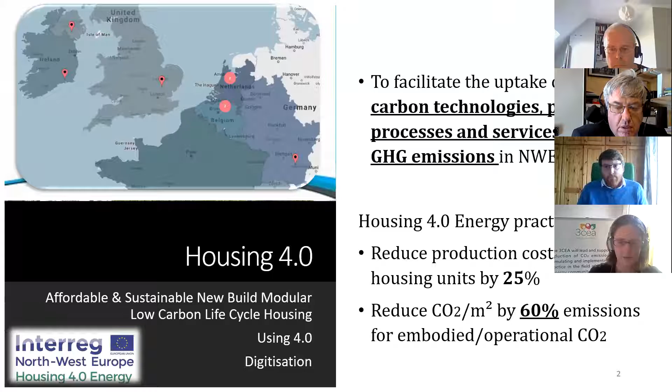The aim of the project is to facilitate the uptake of low carbon technologies, products, and processes to reduce greenhouse gases. That's the overall goal of the call for the project. This particular project, Housing 4.0 Energy, aims to reduce production costs of new build housing units by 25%, and at the same time reduce the CO2 emissions by 60%. That's CO2 emissions of the embodied materials and the operational use of the house.

How are we going to achieve this? Low carbon design is obviously critical, and my colleague Ralph is going to talk a little bit more about that after me in a few minutes. So particularly looking at low embodied carbon materials, in terms of NZEB and the new Part L technical building regulations, our energy ratings and energy building of homes and buildings now is already quite low. So what are the other options of reducing carbon emissions? Looking at better or lower embodied carbon materials, also looking at logistics and procurement, local contractors, local supply, less transportation to site of materials and M&E systems etc. Obviously the less transportation, the less carbon emissions relating to that build.

And finally, what I'm going to go into a bit more detail about now is the digital platform. How do we replicate the designs of these homes to make them more replicable? And therefore, if it's more replicable and easy to use by clients, designers, homeowners, housing associations etc., will that reduce the cost?

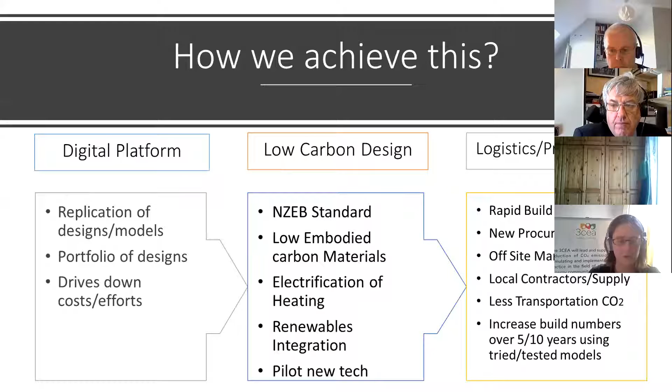Housing 4.0, based on the original idea when this project conception started back in 2015, 2016, we were looking at Industry 4.0 - the trend of automation and data exchange in manufacturing. So digitalization, using smart technologies, using data exchange. How can we bring all of that together in terms of housing?

So design for manufacture - I'm not going to talk too much about this because I'm sure you're all well aware at this stage. Design for manufacture, design for local manufacture, which again looks at the reduction in the need for transportation, and again the reduction in CO2 due to transportation, so keeping everything local. And then design for assembly - so design for manufacture and assembly. That's the model that this project is based on.

So what can we do here in Ireland? We're working with a number of partners across the EU, some of whom are at a much more advanced stage.

The idea behind the Interreg funded projects is that we learn from our European partners. We're not trying to reinvent the wheel here. There are plenty of people and plenty of countries doing this already. So how can we learn from them, and how can we increase the uptake of such design for manufacture and assembly here in Ireland?

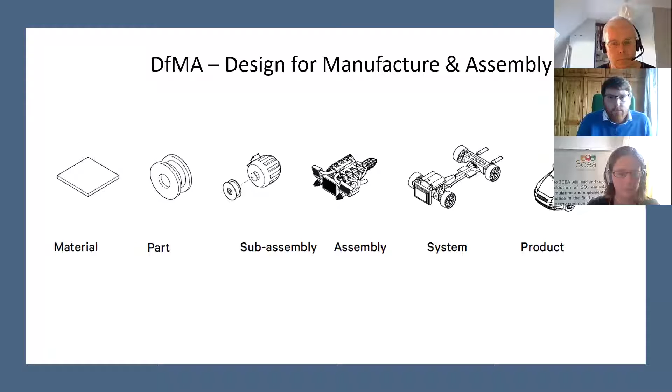Just a couple of simple examples to give you an idea of what we mean by design for manufacture and assembly. Here's a car - the end product is the car, and we look from the very start: what materials are we using, each of the different parts that come from the various suppliers along the supply chain, assembly in the factory, and then the end product is the car. So that's a very simple one.

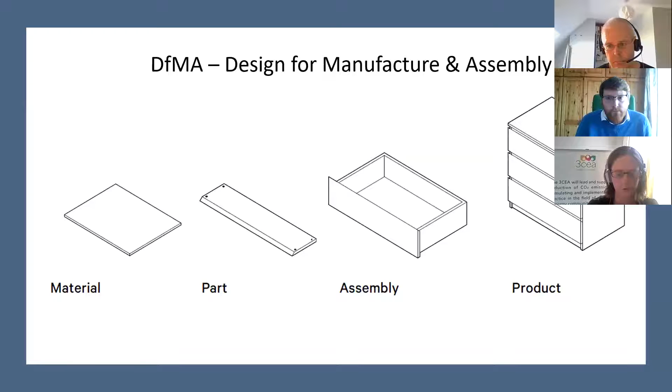At the same time, another very simple example - I'd be very surprised if there's anybody on this webinar today who hasn't put together some kind of IKEA or other piece of furniture. It's exactly the same idea here. We start with our material, each of the parts are made individually, and then you purchase the product and assemble it yourself at home and end up with the end product. And if you have a screw left over at the end, you know you've done something wrong - that's if it's IKEA anyway, it's all very exact.

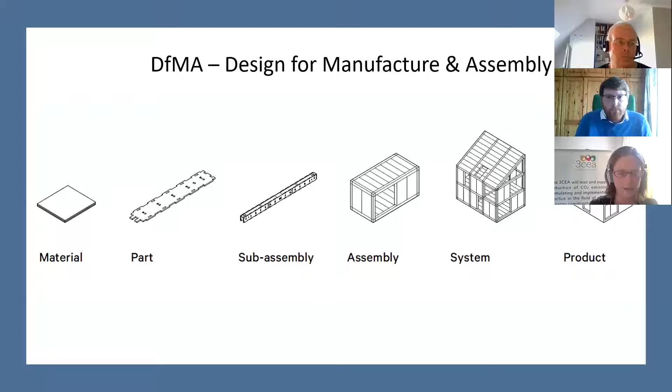In exactly the same way, we're trying to bring that idea to a larger scale, with our end product being a housing unit in this particular project, Housing 4.0. So modular build of homes, easy design, low carbon materials, supply off-site, assemble on-site.

How we're looking to do this within this project is by creating and developing a digital platform. We're working with our 3 partners here in Ireland, and there are 4 or 5 other partners across Europe doing similar work. The pilot sub-partners in Ireland - Carlow, Kilkenny and Wexford local authorities - are all designing and building their homes. We are taking that information from the units they are designing and building, and creating a digital platform. All of that information will be open source and available for use by the local authorities themselves, by other local authorities, by other housing associations, or indeed by individual private homeowners who want to build a modular low carbon build home.

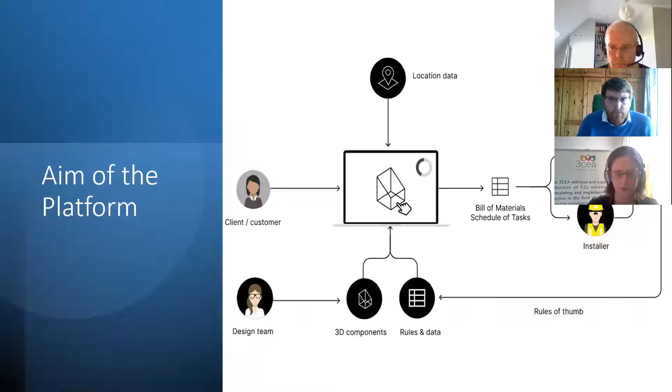So the idea of the platform is that we get all of the individual components, the 3D components, and all of the rules and data, and it's put onto the platform. The client or customer comes along, designs their house, and the platform will create the bill of quantities - basically the bill of materials - send it off to our local manufacturers and installers, and the unit can then be manufactured and built on site.

The digital platform - here's the back end view. The top is what our end user should see, and I have another picture at the end. It's still in development, so this isn't the final version, but this gives you an idea of what we're developing. The user interface is at the top - that's what the user sees: I want to build a house, this is the type of units I use. The back end is all of these, what we call the hanger configurator - the different envelope types, and how it's all pulled together.

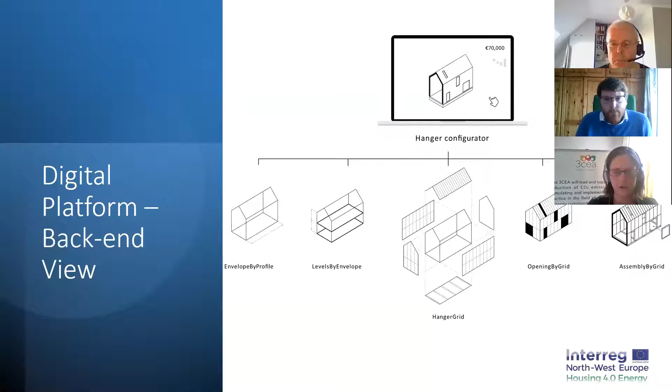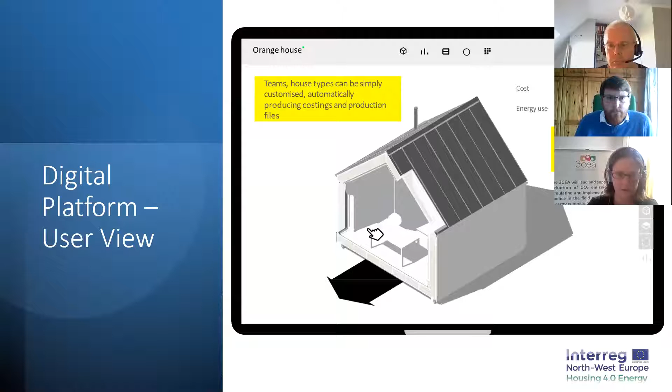From a user point of view, this allows the end user - the private homeowner or housing association, whoever is using the platform to design their home or houses - to come up with a detailed bill of quantities, which gives a detailed cost. Also, very important to this project, an energy consumption and usage performance of the building, based on all of the details of the different material types, the building envelope, the mechanical M&E systems, etc., that the user has chosen.

I've mentioned already our sub-partners, Wexford County Council, Carlow County Council and Kilkenny County Council. We have Sean from Wexford County Council, and he's going to go into more detail about their specific pilot, which is a block of apartments, a 4-unit block.

In terms of innovation and replication, the digital platform, it's essential that we get as much information on the platform to make it usable, help with scale and ease of use, and lead to cost reduction. One of the aims of this project was a decrease in construction cost of units by 25%, which we've looked at doing through these pilots. There will be other design and building systems used by other partners across Europe, all available on the platform for everybody to use.

There's a necessity for using non-fossil products, so the low carbon element of this project is absolutely critical. I mentioned before the new building regs, Part L. We're already building much more energy efficient homes than we used to, but what are the other ways? Looking at different materials is critical, and piloting some new technologies. Ralph's going to go into that in more detail in a minute.

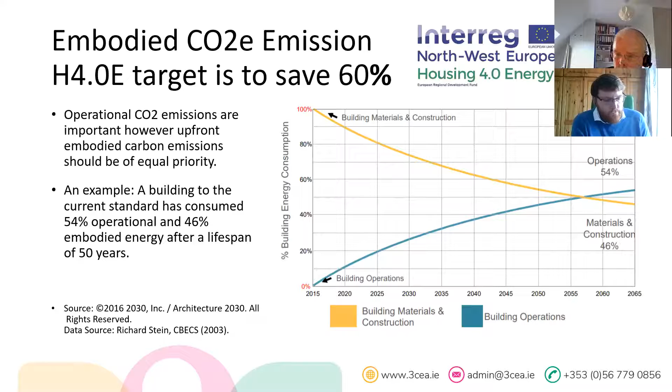That means the major impact will still be the upfront embodied CO2 emission used to build the house, and that is what we need to reduce as well. We should also know that the weight of the upfront embodied CO2 emission will be even increased when we move from NZEB buildings towards zero energy buildings.

Full life cycle assessments, cradle to grave, are very important contributions towards a sustainable future. However, it's crucial for climate change mitigation to reduce CO2 emissions now and within the next decades. We are planning to achieve our savings through substitutions, which are low embodied carbon building methods, low carbon and renewable building products, and recycled aggregates.

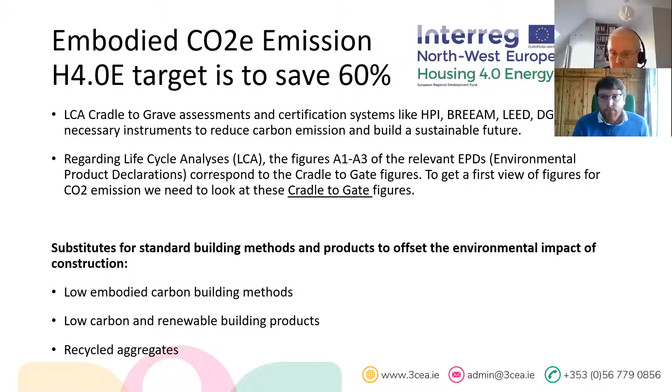The financial sector also has a big influence and can support this. Climate change is meanwhile accepted as a financial risk, so green investments will be preferred, and cheaper capital is also accessible.

Regarding the new EU taxonomy, building developments count as green investment if the benchmark is at least 20% lower than the minimum requirements, and we are sure that an upscaled H40E project via the platform will be a green investment.

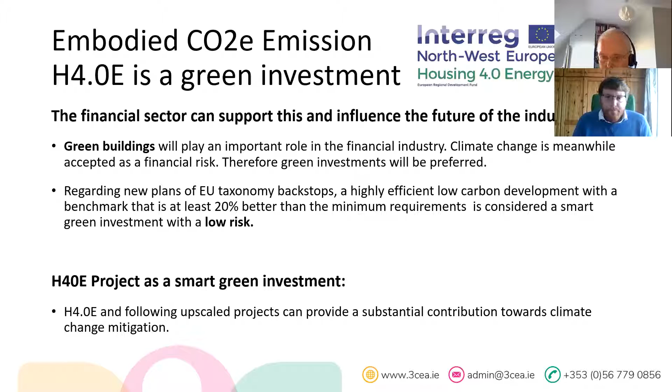So why do we need this comparison scale? We need to find out which substitution or combination will achieve how much savings we need to achieve.

We develop a detailed program for a baseline construction type and for improved types. The detailed development includes an analysis of the U values, humidity, drying reserve, temperature, summer heat protection, and an LCA assessment based on EPD information from the used material.

So the LCA will be an A1 to A3 cradle-to-gate analysis, and the basis for these calculations are the quantitative surveys of the Irish pilot designs.

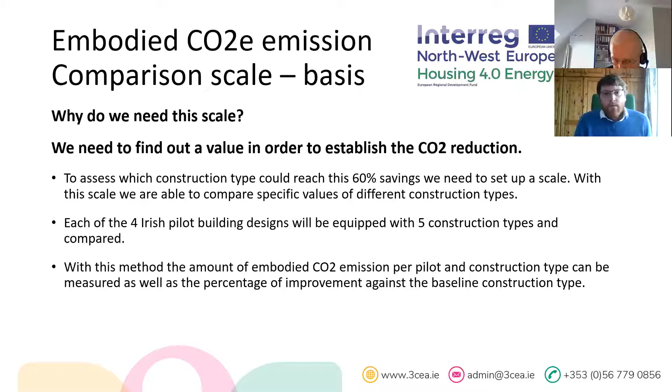In order to make the comparison, we used a calculator called Ubakus, and we designed the various details of the construction types with the aid of this tool. This tool calculates the LCA based on the construction details.

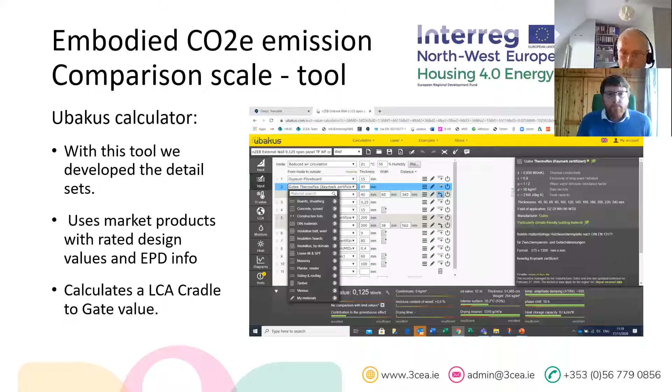We have 5 different construction types, and shown here are the wall build-ups. The first is a baseline, an Irish standard concrete brick, and the second is an ICF, an insulated concrete framework. The third is a standard Irish timber frame applying to IS 440.

The fourth one is an Irish timber frame applying to IS 440, using low carbon and non-fossil based products as much as possible. And fifth, I called it an EU standard - details commonly used in Germany. It's a timber frame with mostly renewable products, which stores more CO2 than is emitted in A1-3, also in sourcing and production.

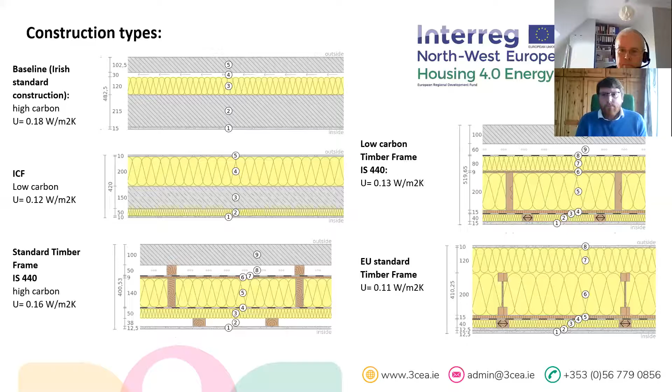As an example, I chose Carlow. It's the Carlow pilot, because it's the most developed pilot, and all pilots vary in size, scope, and construction types.

So with this sample, we show the Carlow project, and the CO2 saving method is ICF, and we're using GGBS cement ratio and then RCA, recycled aggregate ratio.

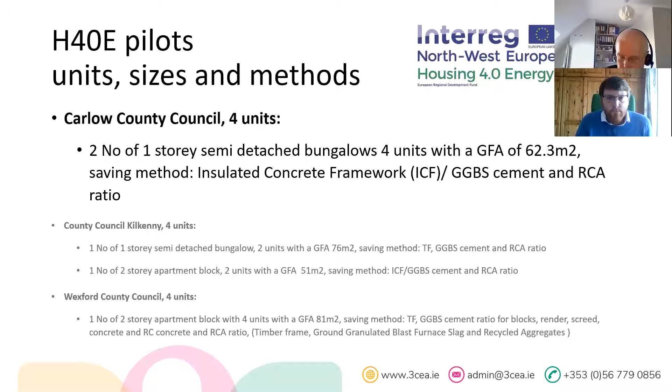The baseline is a standard NZEB building with a minimum required backstop values of TGD 2019, with a circa BER rate of A2, and has no low carbon substitute methods or material as the baseline.

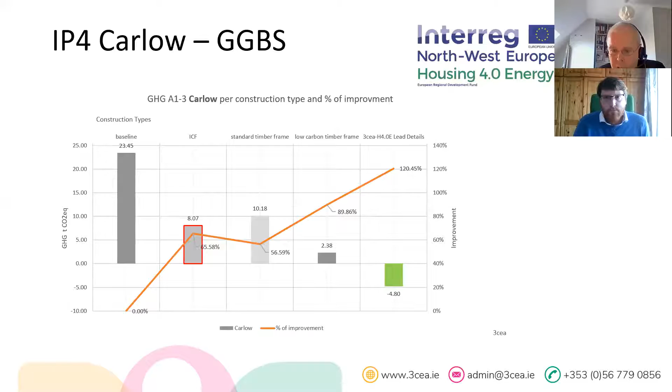The conclusion is we need to reduce CO2 emission now and within the next 20 years to mitigate climate change. A big impact will be upfront embodied CO2 emissions, and we need to identify the upfront embodied carbon emission of the construction type. This will be a first step into a sustainable design approach, and combinations of substitutes can help to achieve this.

Identifying the upfront embodied carbon will be part of the H4.0E platform. So there will also be a carbon calculator, and that will be an addition to the upscaling process.